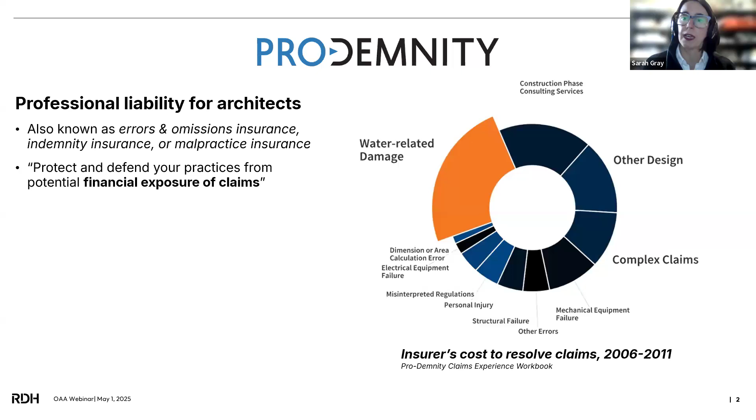So what kind of claims does Pro-Demnity manage? Well, from 2006 to 2011, which is unfortunately the most current information that I had, a big slice of the insurance claims that Pro-Demnity managed was related to water and water-related damage. And of that slice, almost two-thirds of those claims related to building envelope, building enclosure failures. In that regard, since 2004, Pro-Demnity has excluded coverage to architecture firms for ingress of precipitation, meaning water leakage claims.

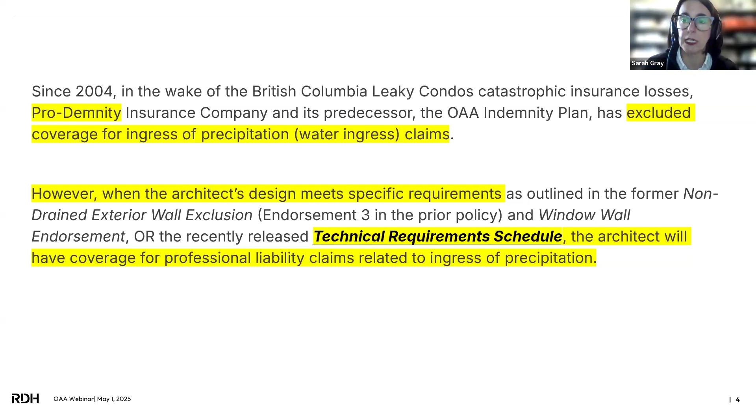However, don't freak out yet. When an architect's design meets the specific requirements called the technical requirement schedule, the architect or architecture firm will have professional liability coverage related to water leakage. So today I'm here to talk about the technical requirement schedule that Pro-Demnity has, but really I'm going to be talking about best practice building envelope design for precast wall cladding panels.

About a year ago, April 2024, Pro-Demnity issued new technical requirements, or really they were updated requirements. What do those requirements say? Well, you can go online to Pro-Demnity's website. You don't even need a login, password, or anything. You can download their technical requirement schedule. In short, they say that above grade wall assemblies that are designed and constructed according to rain screen principles that have positive drainage to the exterior will be covered by Pro-Demnity.

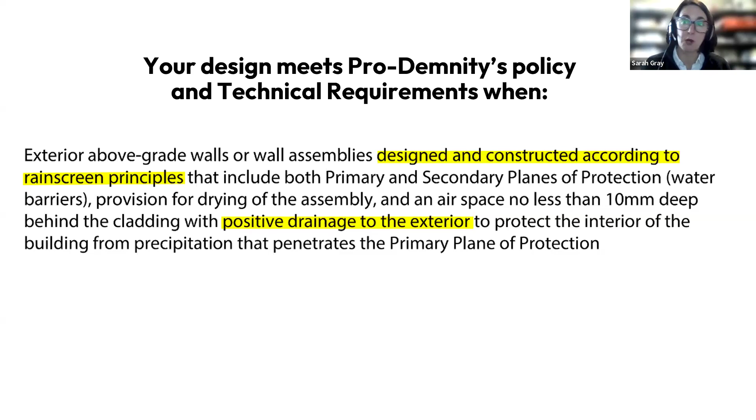If your design has a rain screen wall design assembly, you meet Pro-Demnity's technical requirements, in short. Most wall assemblies these days do have a rain screen design, but there have been some exceptions and some nuance over time. So Pro-Demnity has 3 sets of requirements. They used to be called endorsements. One is for exterior above grade wall systems, sort of an umbrella or general term.

Really, that was meant to handle exterior insulation finish systems, or EIFS. Original or older EIFS assemblies were not drained assemblies, and certainly now we do have drained EIFS assemblies.

Letter B, which we are talking about today, has a separate set of technical requirements for architectural precast concrete exterior wall assemblies. And then the third set of technical requirements that Pro-Demnity publishes is for window wall systems. Again, early versions and iterations of window wall systems were not drained, and certainly newer, current, modern window wall systems are drained.

So Pro-Demnity realizes that systems are available for above grade walls, EIFS, precast concrete wall panels, and window walls that are drained. Therefore, they're advising you as architects to use and design those drained systems.

So let's dig into the precast cladding requirements, which is why we're here today. In those endorsement documents you can download for precast cladding, the first requirement states that you must design, construct, test, and install precast panels with drained and vented 2-stage joints, with insulation as part of the wall assembly, with a continuous air barrier as part of the assembly, and with vapor control or a vapor barrier as part of that assembly.

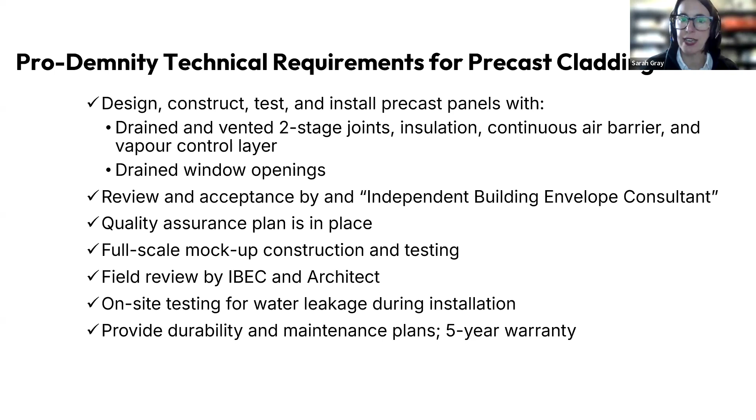So these check marks are the highlights, the summary of Pro-Demnity's requirements. Today, we're going to go into the requirements in detail. Certainly my lens is building science and building envelope design, so we're going to talk about the nitty-gritty technical details and design elements for precast cladding.

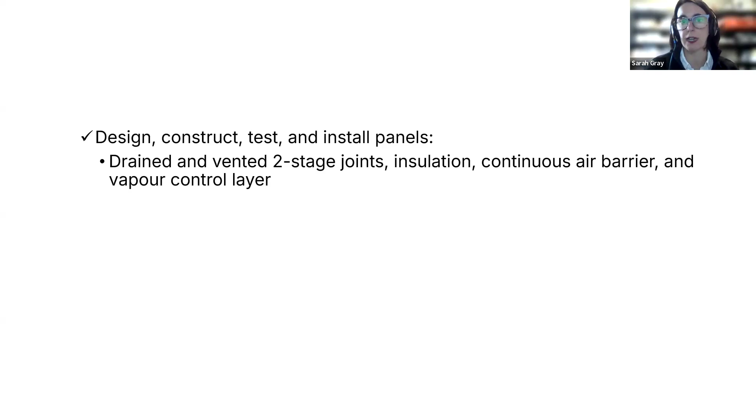So first and foremost, Pro-Demnity requires the drained and vented precast assembly. Why is that important? Well, as I mentioned, the rain screen design principle has been known and in use for many years. I expect that many or most architecture firms use that almost exclusively as the design. And what does the rain screen design principle look like?

Well, there's typically an exterior finish or cladding that's installed over insulation and over the air-water vapor barrier, which is all installed over the structure or support. So this is a very generic wall section, not necessarily precast, but this shows what we call a perfect wall assembly or a rain screen design. How is it rain screen? Well, that outer cladding is vented and drained, allowing moisture to drain out or dry out from the materials behind. That's very simple 101 of rain screen design.

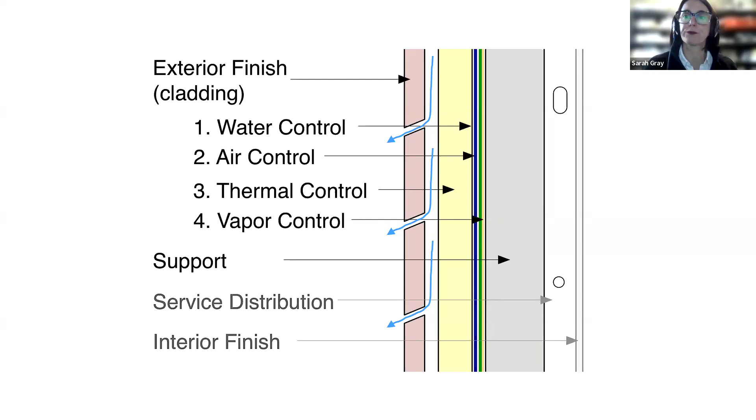How could precast meet the design of a rain screen? Well, the most simple approach for providing a rain screen design for precast is using hand set precast. These are typically smaller pieces of precast, both smaller in width and height, and also typically a bit thinner. They act as a cladding, very similar to how a metal panel could be formed as a rain screen cladding.

An aluminum composite panel, brick veneer could be installed as a composite panel. You can see that the precast is installed with an air gap between the back of the cladding and the insulation. You can see the air vapor water barrier membrane, the blue material behind the insulation, and then the concrete block backup wall behind.

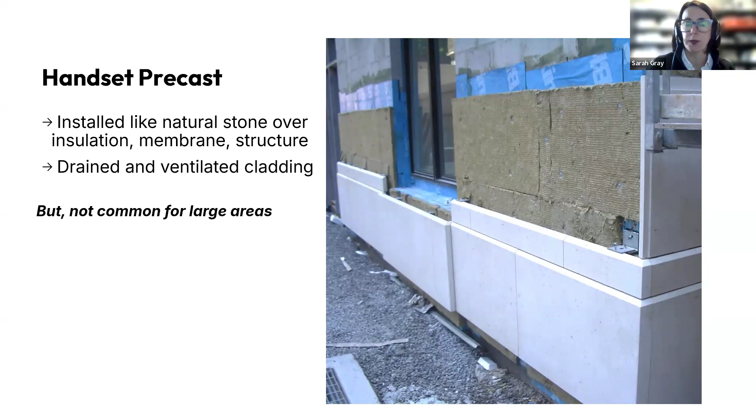So classic precast assembly. However, this is not typically what folks think of when we say the term precast cladding. We're typically meaning now very large format panels that could span floor to floor or even two floors and are quite wide, meaning meters wide. So instead of these smaller pieces that are installed very much like natural stone, we're looking at a more prefabricated large format wall panel system. And that's the intent of today's talk. But I just wanted to mention how precast could be installed as a true or traditional rain screen assembly.

So now let's look at the two more common precast panel types. First is what we call architectural precast or single-wythe precast. That's where we have a thicker precast panel system, maybe 4 inches deep, 6 inches deep, sometimes even 8 inches deep if it's these very large panels. Installed kind of like a curtain wall, they're hung off the edge of floor slabs with an anchorage system, and the precast spans floor to floor.

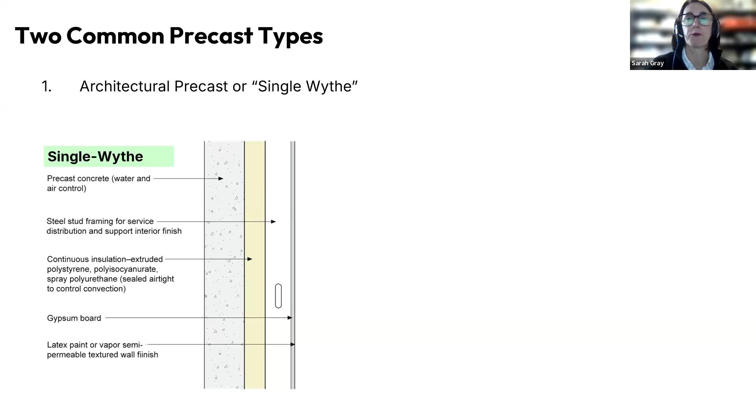The second common type of precast that we're seeing more and more today is the integrally insulated sandwich panel, also called a double-wythe precast panel. These panels are quite thick, 8, 10, or 12 inches thick. There's an outer layer or outer wythe of precast, very similar in looks to the single-wythe approach. But insulation and an interior backup wythe of precast panels is manufactured in the precaster's factory or shop.

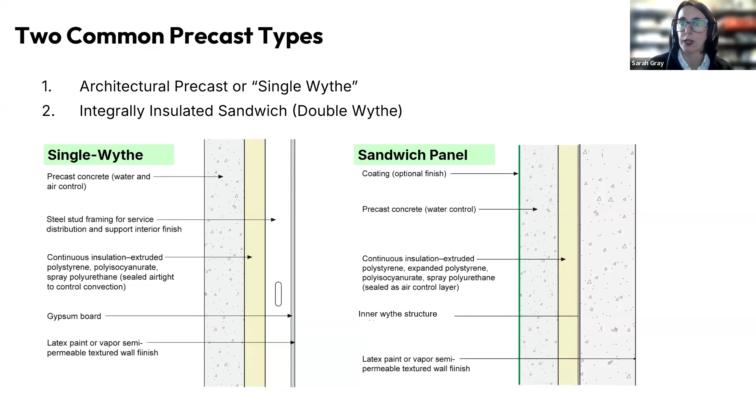These panels come assembled as this sandwich to the construction site and lifted together. Once these panels are lifted together and installed, you have the outer finish, the insulation between the panel, and the interior backup or even finish fully installed. In a sense, you have a complete building envelope with a sandwich panel. So let's take a deep dive into the details of each of these types.

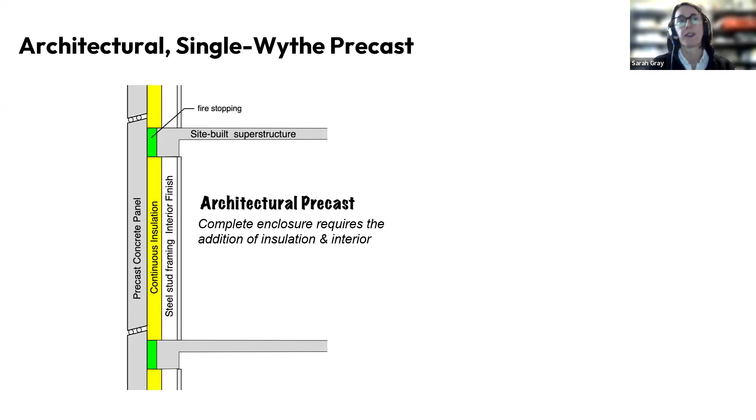So first, single-wythe precast. This is a very crude sketch of how these work. Again, the panels extend floor to floor in height. There's insulation behind them. Between the floor slab and the back of the precast panel that's hung, we'll have to add our fire-stopping insulation and smoke seals, and then the studs and framing go inboard of that.

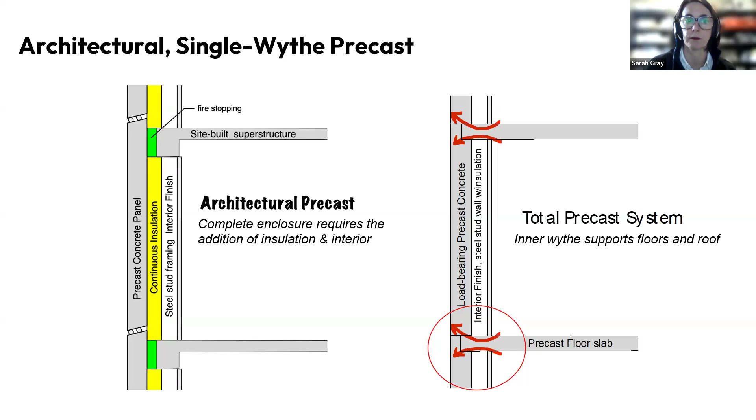There are cases where we have architectural precast as part of a total precast system where we have precast floor slabs and load-bearing precast that rests on the floor slab instead of being hung like a curtain wall. We won't go into detail for the total precast system today, but one thing to consider is that with the wall panels supported by the floor slabs, we have those red thermal bridges at each floor slab that we'll need to mitigate so that we don't have cold spots on the floor and energy losses. Okay, what does a building with single-wythe precast look like?

How are we providing that drained two-stage joint system between individual panels to provide rain penetration control? This is exactly what Pro-Demnity is asking of architects in their design. Again, building envelope water leakage is claim number one in their list of claims. So let's dive in. Pro-Demnity says that we must provide two-stage drained sealant joints. Again, those are the horizontal and vertical caulking joints between the individual panels hung off the building.

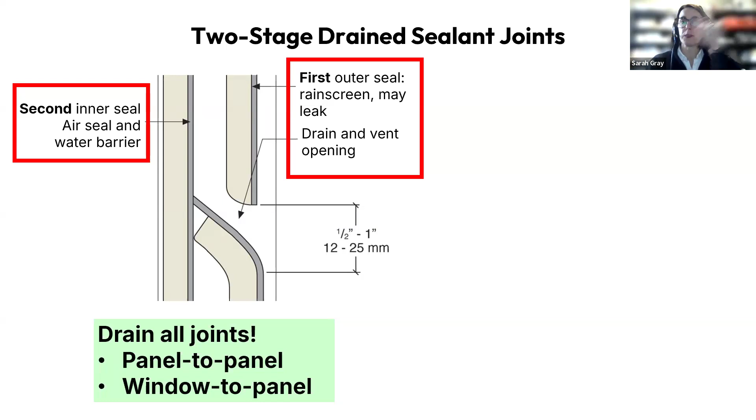So 2 joints are required with precast concrete cladding per Pro-Demnity. If you get anything out of this session today, this is the picture that you should have burned in your mind. Pro-Demnity again says we must drain all joints, meaning panel to panel, and also any sealant joints between windows and the panel itself.

So this is a good 2-dimensional snapshot. What does it look like in 3 dimensions? It gets a little more complicated because we have horizontal joints and vertical joints, as I mentioned. We've got 2 lines of sealant at the horizontal joint with a drainage space between, and also 2 lines of sealant at the vertical joints, again with the drainage space between. The concept is showing moisture, water droplets draining through that airspace between the two lines of caulking to the exterior. In practical terms, what does this complicated 3D drawing mean on site?

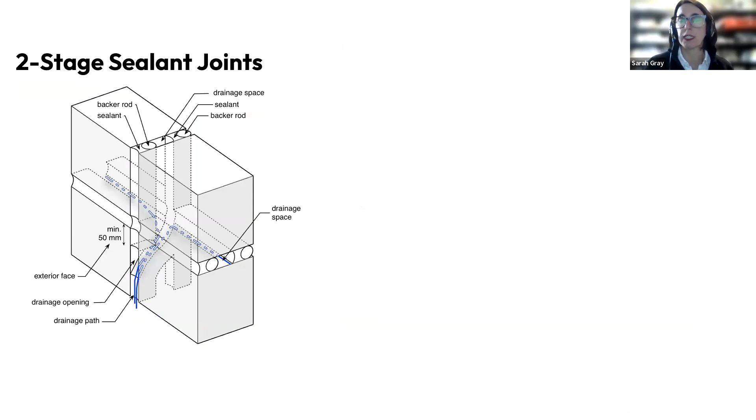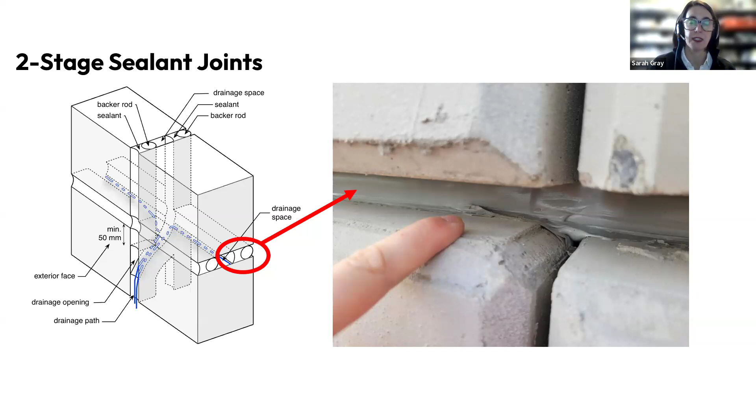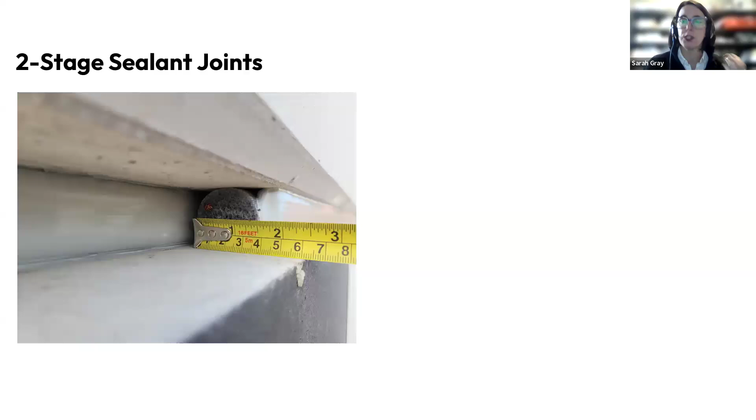So 2 lines of sealant shown here in the photo. We have a really nice cutaway to show the various dimensions. You can see to the left of the tip of the tape measure that there is a gap there. The gap does not need to be huge. I would say a minimum 3 millimeters or 1/8 of an inch does the trick. A little bit wider gives you some wiggle room and tolerance to make sure the backer rods and sealants aren't in contact with each other. So we don't need a huge airspace, but we certainly do need that space to provide the draining and venting.

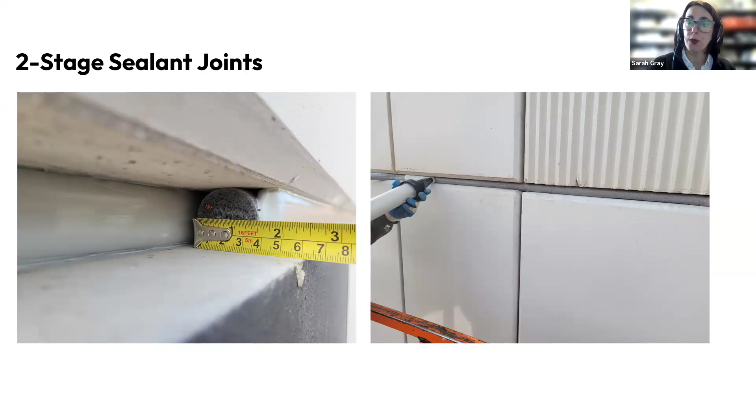And just another photo of how it comes into play on site. So the tradesperson is installing the outer line of caulking here on the horizontal. What does the weep hole or the drain slot look like? Well, this is a fairly well-detailed drain slot. It's at least 25 millimeters or 1 inch tall, the full width of the joint itself. You can see it has a ramped profile going up and inward to the air seal and backstop inside.

RDH typically does not require or recommend using plastic tubes or wicks. Just leaving that joint open allows it to wash itself clean of intermittent dirt or debris. And over time, we've found that the plastic weeps or wicks just fall out anyway. So detailing a nice, healthy drain slot meets the intent of Pro-Demnity.

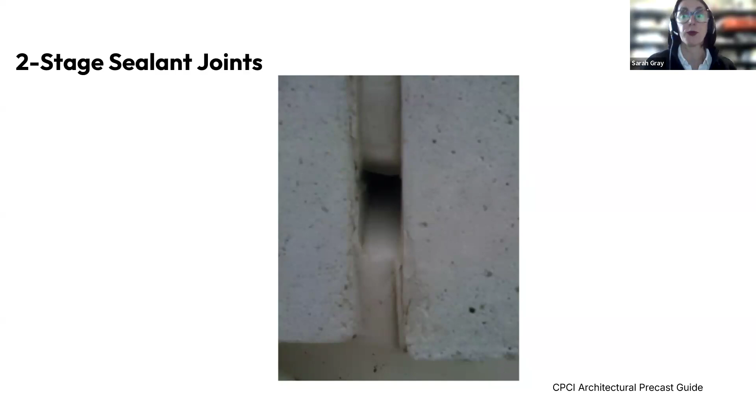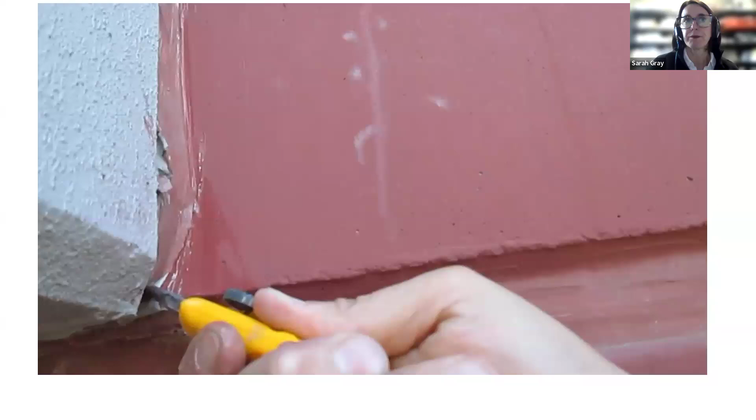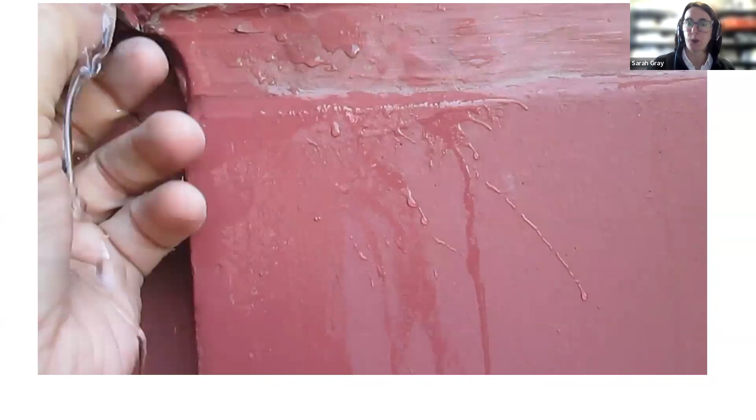So we often get the question, do we really need the weeps? Well, Pro-Demnity says we do, but just to bring the point home, we were conducting an investigation of some water leaks on an improperly detailed assembly. We cut open some caulking joints and found that there was water trapped within the sealant assembly. So yes, in fact, weeps are needed to allow any water through flaws or little skips to drain out. Again, we're mitigating the issue of water leakage that has been a sore point for Pro-Demnity over the years. So that's the 2-stage drain and rain penetration control function.

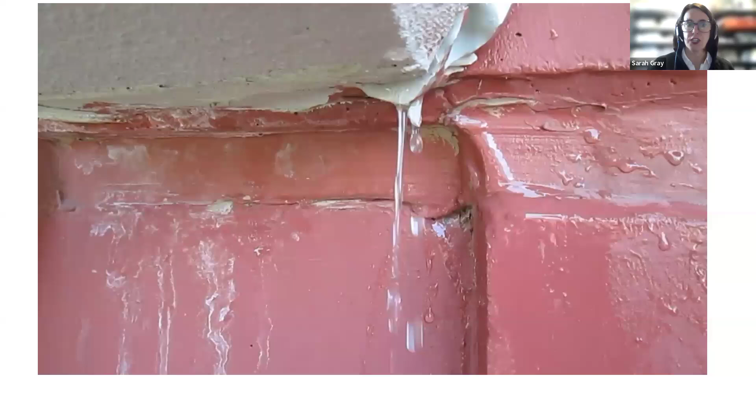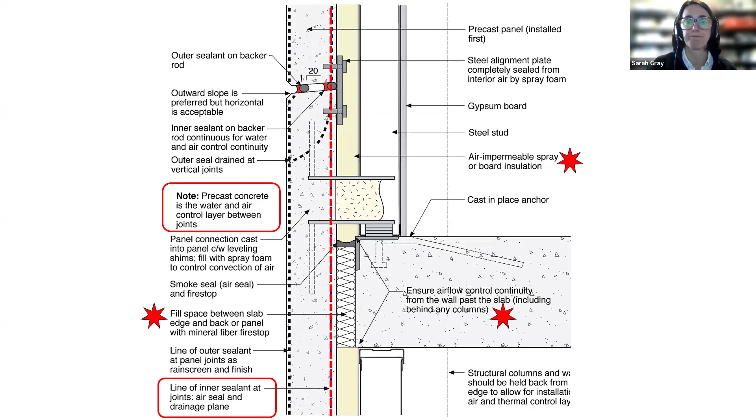Back in the old days, let's say the 1980s and 1990s, we typically did not use spray foams. We've come a long way in the spray foam industry these days. But back in the day, we used metal studs and fiberglass batt insulation.

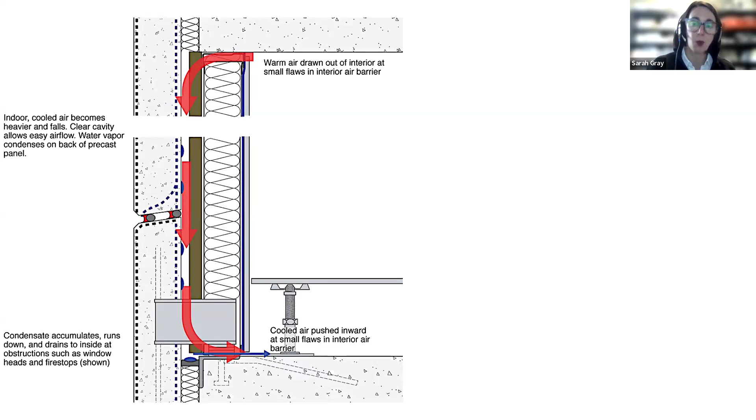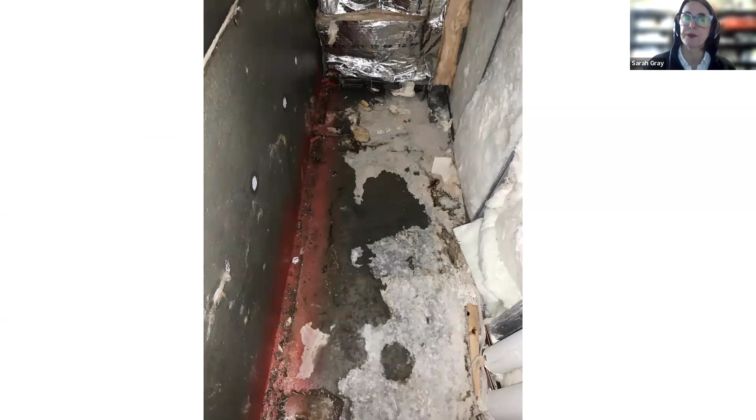The problem with that is that we didn't get a tight air seal to the backside of the precast. That allowed convective air looping, which deposited warm air and condensation on the back of the panels, which would then form ice. So this is an example of what not to do. We don't do this anymore. We do not want ice on the back of the panels because when ice melts, it forms water, which is a form of water leakage.

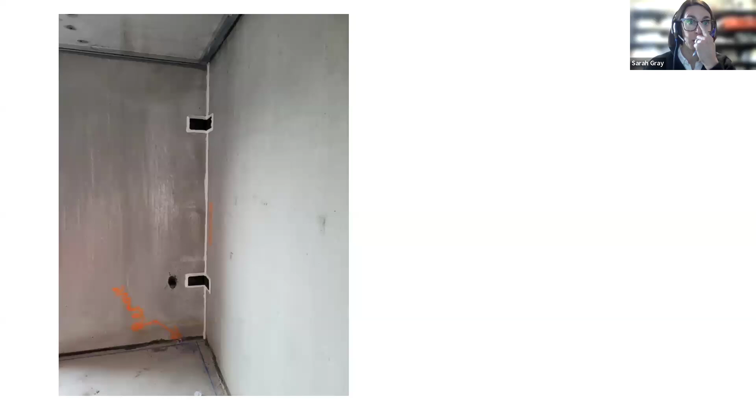Again, going back to first principles for the Pro-Demnity requirements. So going back to that precast building we showed, we want to seal all the joints in the precast, both from the interior and the exterior. We also want to seal all of those anchor plates because those can form or allow air leakage between the plate, the concrete, and through the bolt holes.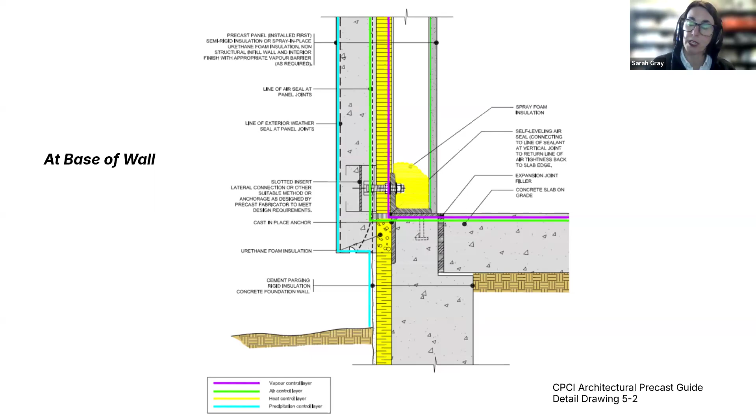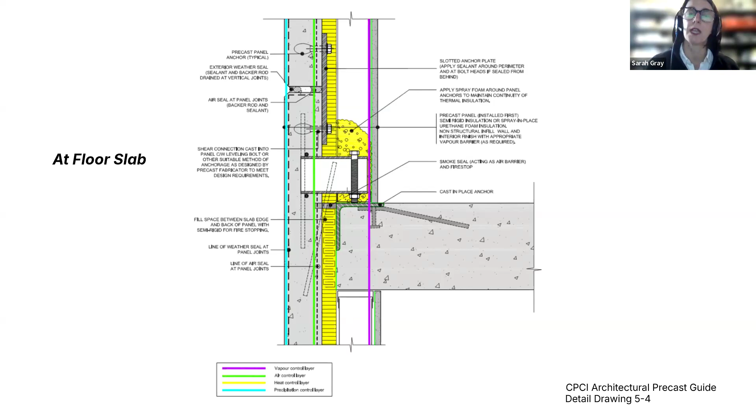Moving up, very similar to the sketch I showed earlier, here at the floor slab, we're providing insulation between the precast and the floor slab, up the wall, and providing insulation around the precast anchor. This is a best practice detail, part of the Canadian Precast Institute design guide, which I'll talk about in a bit. So these are illustrations for single-wythe or architectural precast.

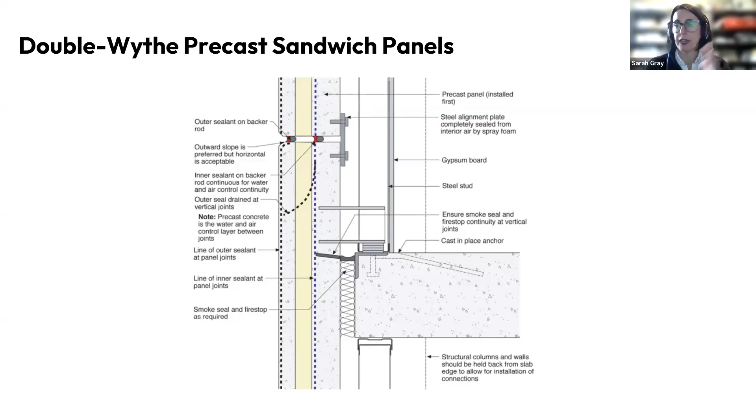Again, these are hung like a curtain wall off the floor slabs, but when they're hung, it's an all-in-one building envelope assembly. We still have to install our fire stopping and smoke seals at the floor lines, but we don't need to provide insulation around the precast anchors because our air, water, and insulation layer is within the panel itself.

How do we detail sandwich panels for rain control? The exact same way we do for single-wythe. We must have two-stage drain joints at all panel-to-panel joints. We need to have that nice, healthy rain screen slot as well.

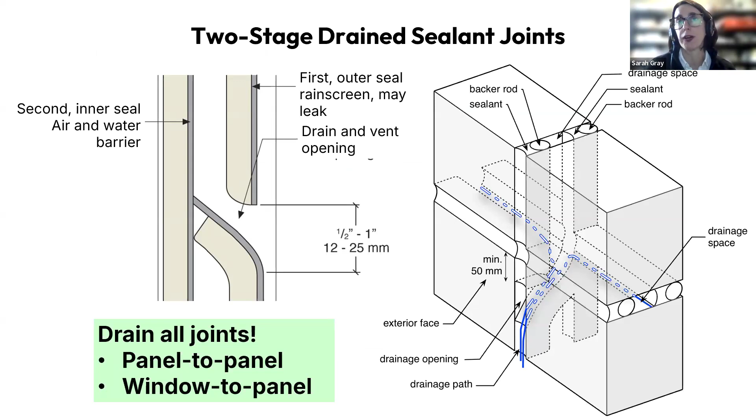What does that really look like for a sandwich panel? Well, here on the exterior, this is where we provide the double line of sealant. There's also an option and a strong recommendation to provide some insulation continuity at the joints there in the middle. And we often see and recommend an interior line of sealant that can serve as a finish if that interior face of precast is in fact going to be the exposed finish without drywall in the building.

That interior seal also provides a second air seal so that we don't get air leaking into that inner joint and perhaps causing some problems. So often the best practice is a triple seal approach for deep sandwich panels.

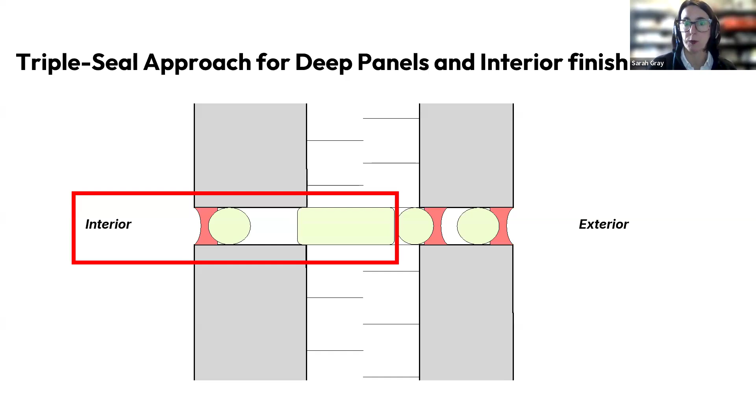What about insulation and air control for sandwich panels? Well, we already talked about that. It's an all-in-one solution. We have the insulation between the two wythes of precast, and we have that inner line of air seal as well. So sandwich panel, single-wythe, slight differences in detailing, but we still need the rain control, continuous insulation, and the air seal.

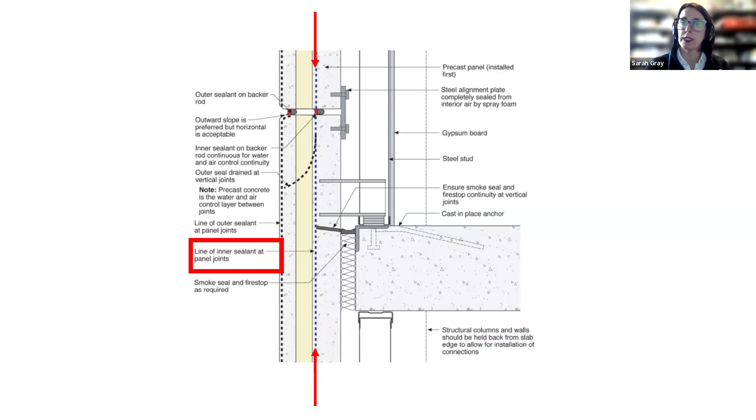Let's look at window detailing because after you install the caulking in the panels, half the battle is over, but the next battle is to get those windows airtight and watertight as well.

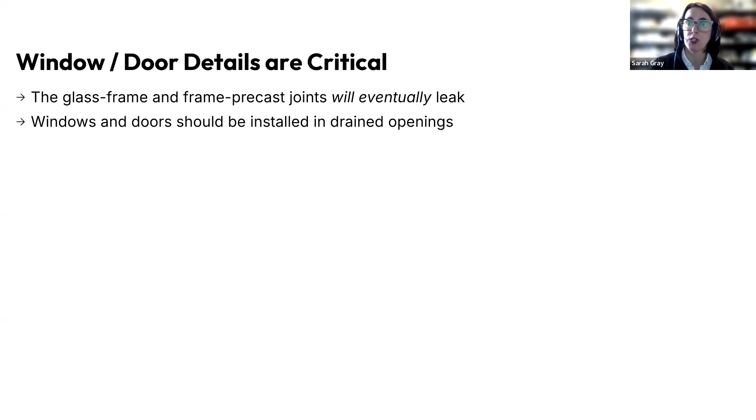From my practice, looking at older buildings that have aged 10 or more years, we often find that eventually the glass and frame joints and the frame to precast joints will leak. Sealant does deteriorate, so we want to anticipate leakage and provide drainage out of the system. Out of the precast, our two-stage drain approach provides drainage, but at windows we need a subsill membrane flashing.

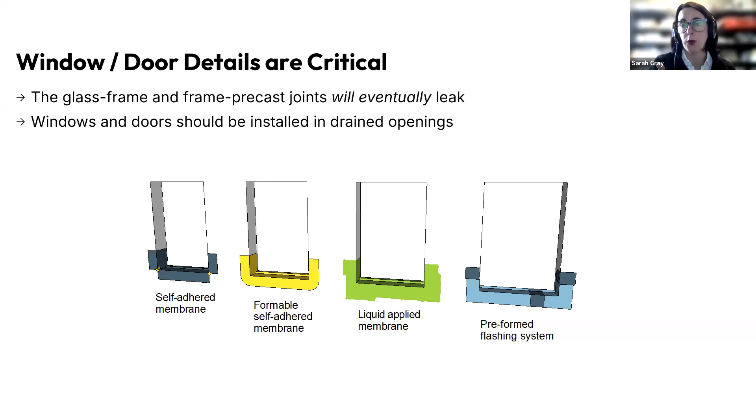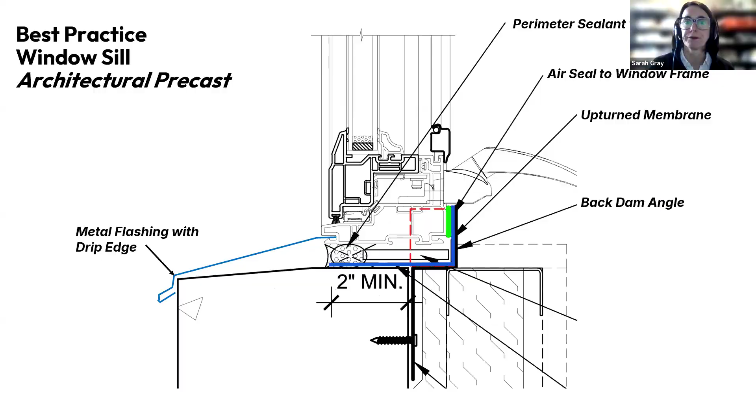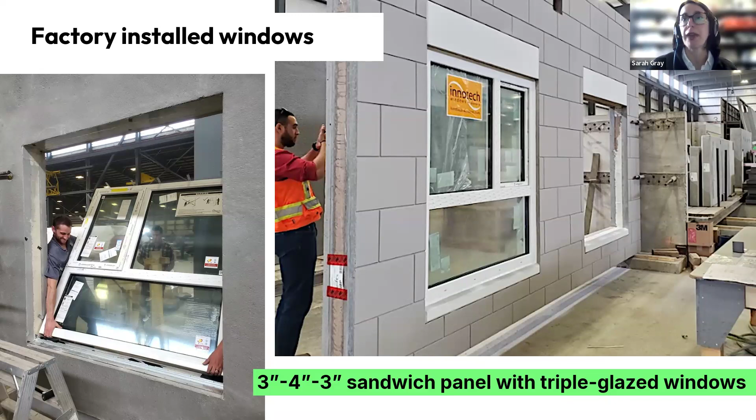Factory installation is a great idea if that can be accommodated, because the windows can be installed in a climate-controlled, dry condition. It's very comfortable. Folks are walking on the floor installing, instead of at height, 20, 30, 50 stories up in the air. So we do see more pre-panelization of both the precast and the windows in the factory.

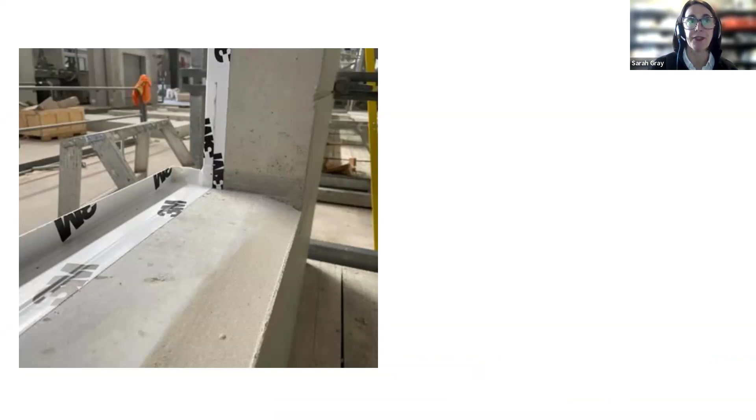Here's a photo of that subsill membrane flashing. In this case, we're not carrying the membrane all the way across to the outer face of the precast. We're recessing the membrane to cover the critical joints and form that bathtub with the upturned leg at the back of the sill and also at the jambs.

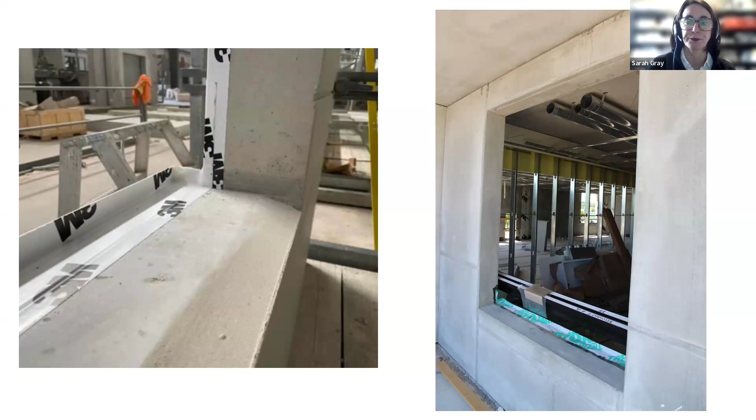Here's what that will look like in a little bit different configuration. This is a different building, but again you can see that subsill flashing, and the window on the interior waiting to be installed. So the critical detail for windows is that subsill membrane flashing and drained sealant between the window and the precast itself.

So metal flashings, though they do cost money and maybe they don't give the specific aesthetic that some folks like, can make a difference in aesthetics and performance in the long run. That's why we recommend them.

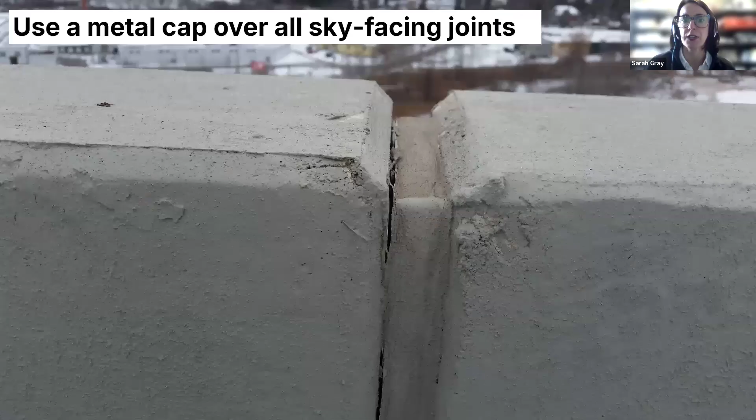Another common best practice consideration is to use a metal cap over all sky-facing joints, not just to shed water and control staining, but also to mitigate water leakage through sealant joints that will eventually crack and debond. So we don't want to see this - I'd like to see a metal cap flashing over this exposed panel top edge.

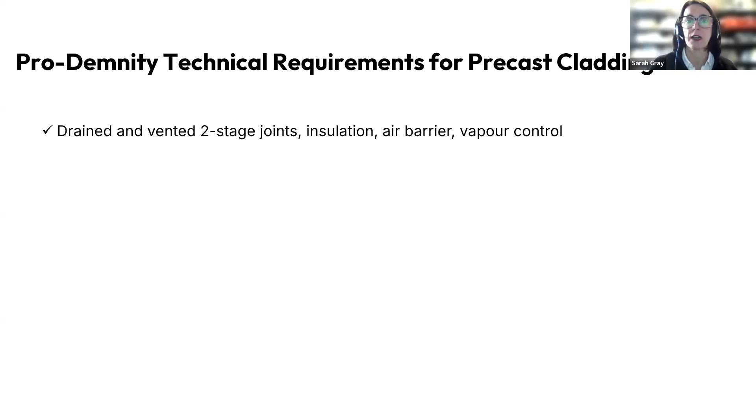Okay, so we've talked about drained and vented two-stage joints, installing insulation, the air barrier and air seals, and vapor control is the precast itself. What's the next requirement from Pro-Demnity for precast? That's the review by the independent building envelope consultant to conduct a peer review of the architect's design of the system to make sure it meets Pro-Demnity's requirements.

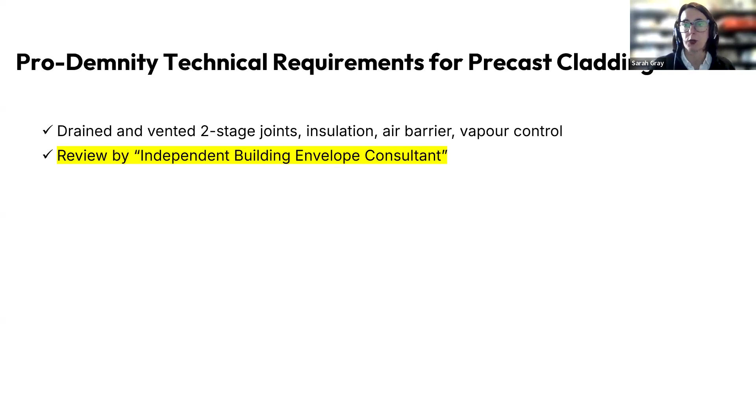So who can be the IBEC? A licensed architect who's not the design architect on the project could be the IBEC. Also an engineer, typically a building envelope engineer, could serve that role. Certainly you want to hire an IBEC who has experience with precast, both design and installation on site.

The IBEC cannot be the same person or company that's providing Tarion's Builder Bulletin 19 services. They want to maintain separation in that regard. And as I mentioned before, the IBEC needs to be independent from the primary design team. The IBEC is a third party.

Typically, we see developers retaining the IBEC. That'll be a discussion between you, the architect, and your client, the building owner or developer, on who needs to retain the IBEC. Pro-Demnity doesn't get involved with that businessy bit. Pro-Demnity just says there must be an IBEC on the project with precast.

So the IBEC first reviews the design, all of those elements that we talked about through the sketches and photographs. So we're looking at precast cladding components.

We're looking at all the building envelope control layers for water, thermal, air, and vapor. We're looking at the precast anchorage, not so much the structural design for building envelope, but how we're detailing around those anchors with sealants, caulkings, and the spray foam that I mentioned before.

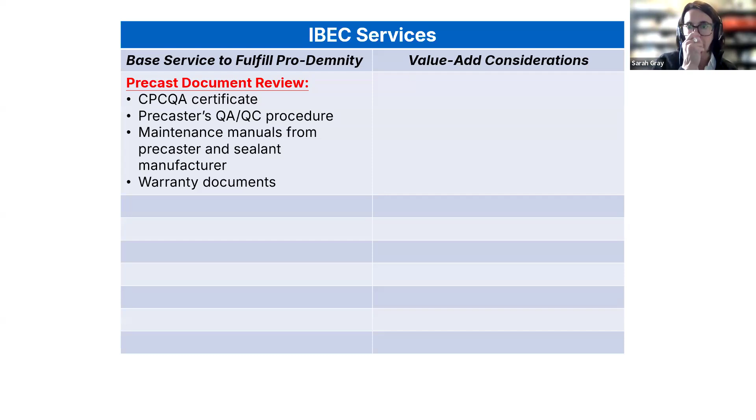Before any precast gets manufactured in the shop or brought to site, the IBEC conducts a document review related to the precast. We're looking for the Canadian Precasters Quality Assurance Certificate, making sure they have an in-shop quality assurance, quality control procedure in place. We're looking at their maintenance manuals, and we're making sure that they can eventually provide a warranty. What does their standard warranty say? Does that provide adequate coverage for the project?

As I mentioned, the next step after the document review is that design review. So as part of that, the IBEC is making sure that the architect's design follows best practice design guides. Those include CPCI, Canadian Precast Concrete Institute's Architectural Precast Concrete Wall Guide from 2017, and CSA standard A440.6 for high exposure fenestration installation.

So both of these guides basically include all of that best practice detailing that I showed in my previous slide, things like providing critical barrier continuity, seals, air barrier continuity, insulation continuity. The CPCI guide is available as a free download from their site.

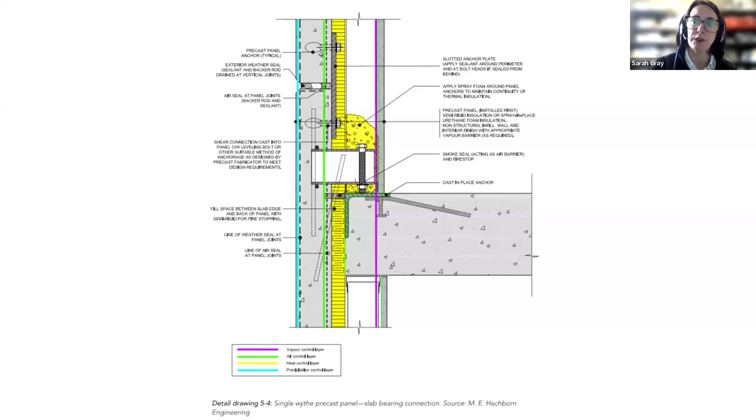Malcolm Hachborn and others authored this guide. It has good narrative discussion, but it also has a series of details. This probably looks familiar, I just showed that earlier. That shows not only the installation concepts and geometry for the precast in comparison to the structure and floor slab, it also shows those building envelope control layers which need to be continuous throughout the design.

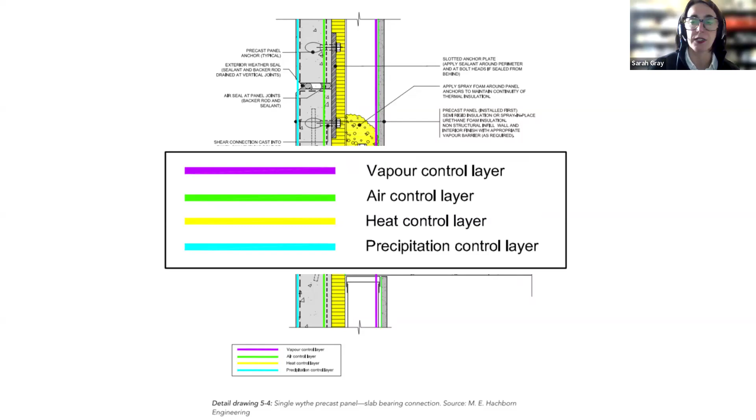So CPCI's design guide sketches are very, very helpful. And CSA A440.6, in high-level summary, basically says provide subsill membrane flashings and drain sealants. Of course, there's more detail in that standard, but again, they're looking for best practice window installations.

Okay, we've got the design over with. The precast cladding manufacturer is on board. They're producing their own shop drawings. The IBEC needs to review the precast shop drawings as well as the architect, of course.

On the engineered shop drawings, we're looking that those drawings are project specific. They certainly need to include the structural attachment of how the precast is going to get hung to the building. And we're also looking for the continuity of the air seals, the insulation, the drained rain screen design.

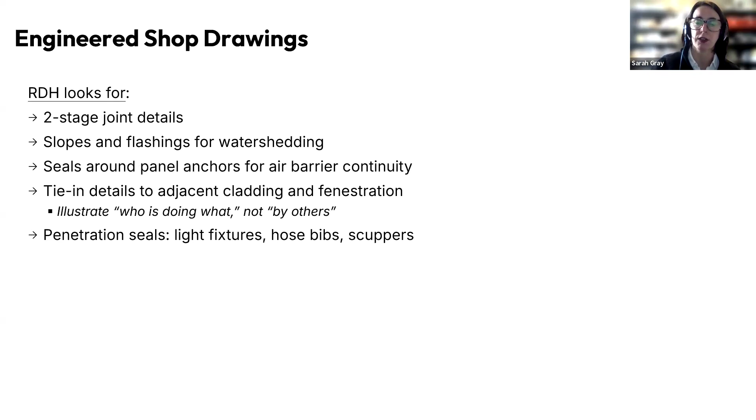We're looking for those tie-in details, as I mentioned, and there are typically little details that the precast shop drawings may miss, such as sealing around light fixtures, hose bibs, scuppers, etc. So we want to make sure that those typical details are also included on the shop drawings.

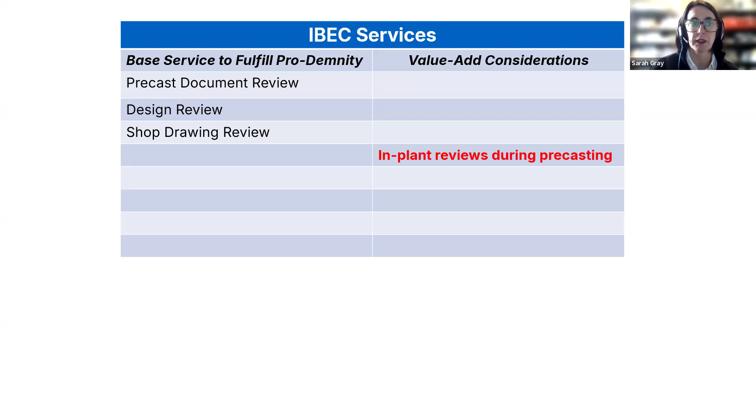The next step in the IBEC process could be for the IBEC to conduct in-plant or in-factory reviews during the construction and manufacture of the precast panels. That's not required by Pro-Demnity. That may be something desired by the project team if there are tricky details or some sort of aesthetic that needs to be reviewed in the plant.

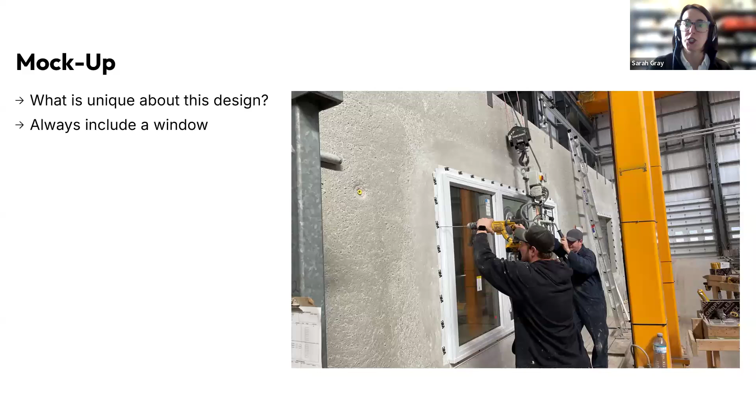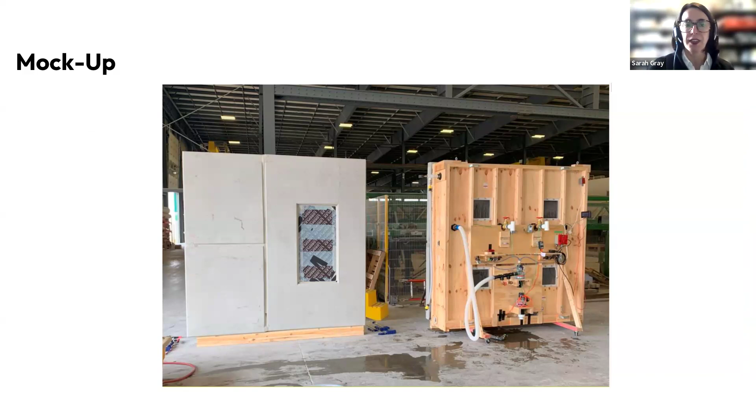Tests are conducted on the shop, where we're really testing that two-stage drainage joint and the installation of the window within the panel itself. If we've passed the mock-up, the next step is for the factory to make all the precast panels and bring them to site, and then the IBEC needs to conduct field review.

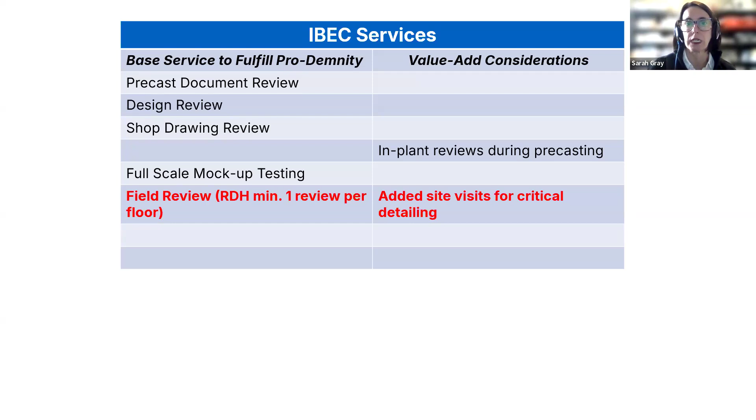Pro-Demnity does not prescribe a number of site reviews. RDH's typical approach is to provide one site review per floor of panel being installed. We could conduct additional reviews if desired, or if there are tricky details. So what does our field review include?

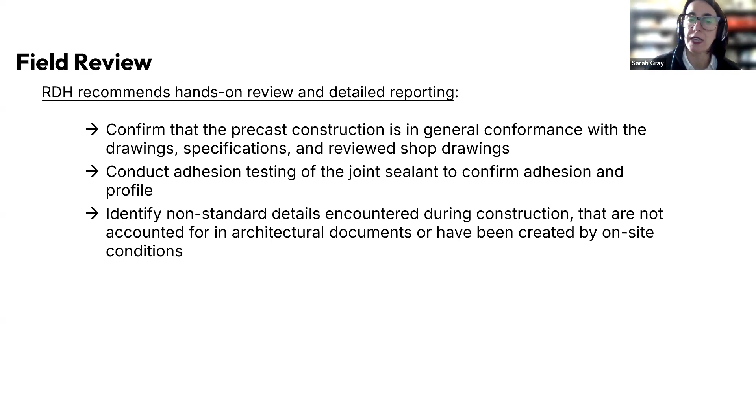A hands-on, detailed review, not just a drive-by in the car, not just a checkbox to say we were on site when we maybe weren't. Our RDH team goes on the wall, hands-on, either from exterior scaffolding or interior access, to review the two-stage joint seals, conduct adhesion testing of the sealant joints, look at any non-standard details that may need RFI and site instruction, and talk to the contractor installer to make sure they understand everything needed so that Pro-Demnity is satisfied.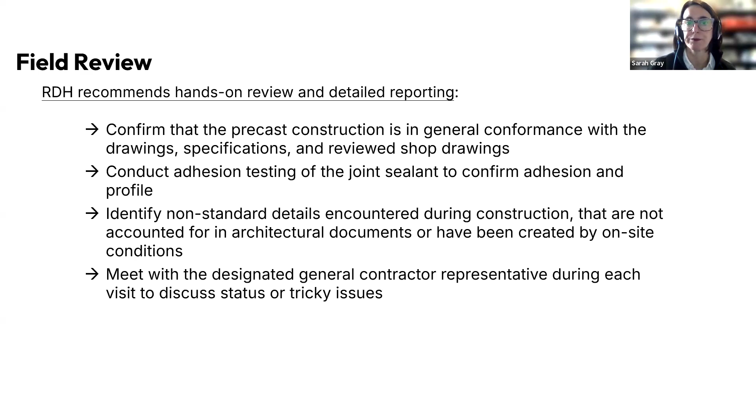What are we looking for in the sealant joints? We're making sure the specified material is being used. We're looking for backer rod, surface prep. Some sealants require primer when applied to precast, so we're checking that's applied where required, and we're spot checking the profile.

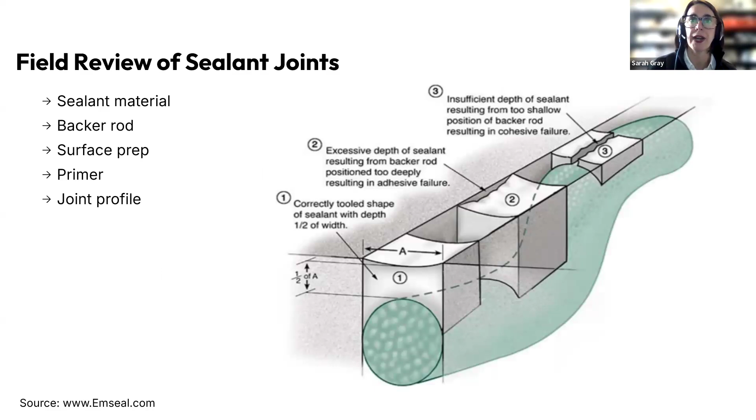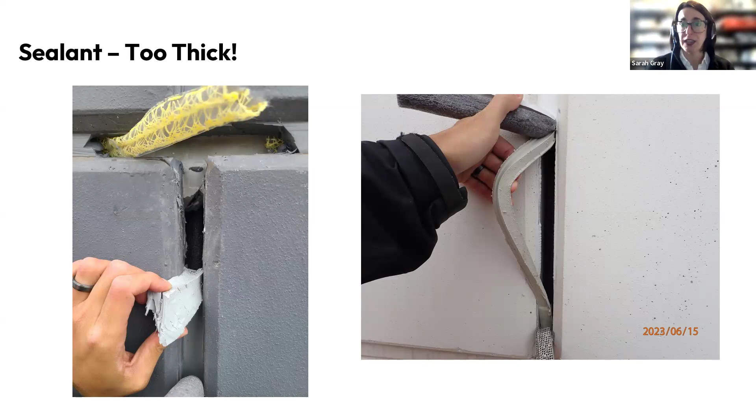Here you can see a sealant joint that's just way too thick. Having an inch or more depth of sealant is a waste of material, and that blob of sealant won't provide the stretch or squishiness needed to accommodate thermal movements or structural deflections. So when we see sealants that are too thick, we'll flag those for replacement.

On the opposite side, we also see cases where sealant's been applied too thinly — it just doesn't have enough bite to the precast to form an effective seal. In some cases, even if the sealant is the right thickness, it can be debonded, maybe because of the surface texture of the precast, or dirt, dust, debris on the concrete when applied. So we'll do probing and test cuts, pull tests, to confirm the sealant's adhered, and mark debonded areas for replacement.

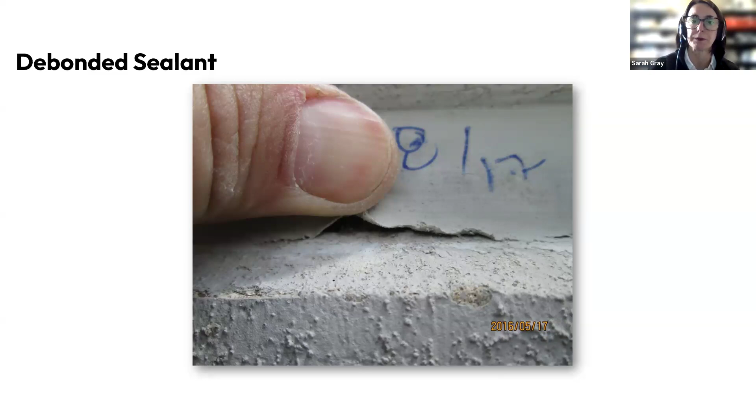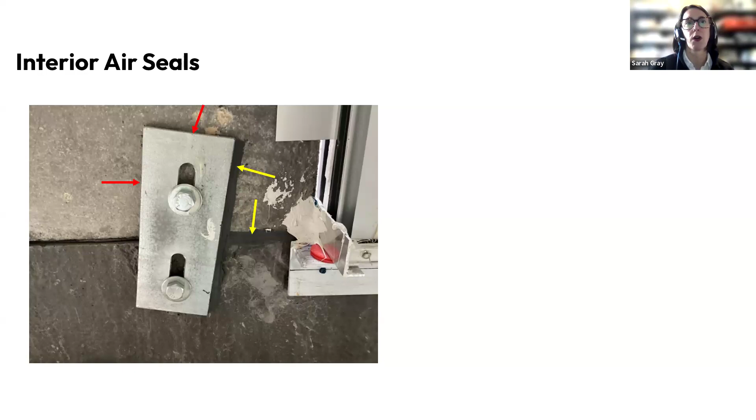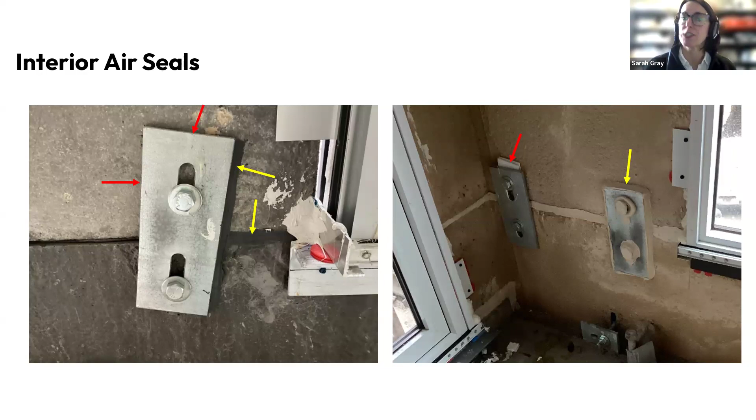A second example on the right-hand side: the yellow arrow shows a nice complete seal system, but on the left side anchor, for whatever reason, they forgot to seal it. So we'll flag that to get those sealants installed and reduce air leakage.

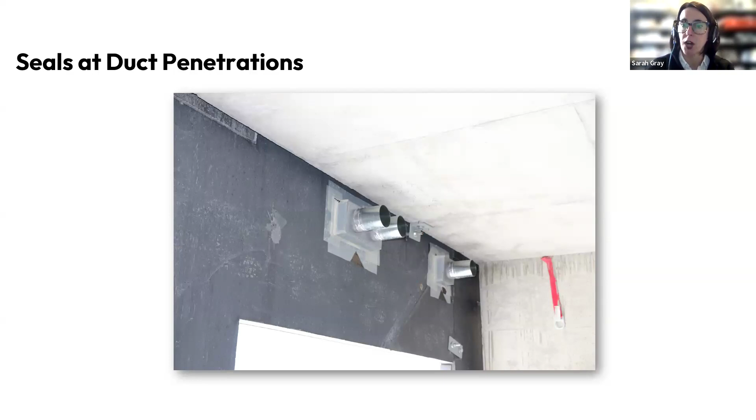For bigger penetrations like this exhaust duct bank, it looks like this installer used a membrane product to more effectively seal the exhaust box to the back of the precast. These seals need to be installed before the spray foam insulation is applied — spray foam is insulation, not an air seal in this case. So we want to see caulking and membrane products providing the air seal.

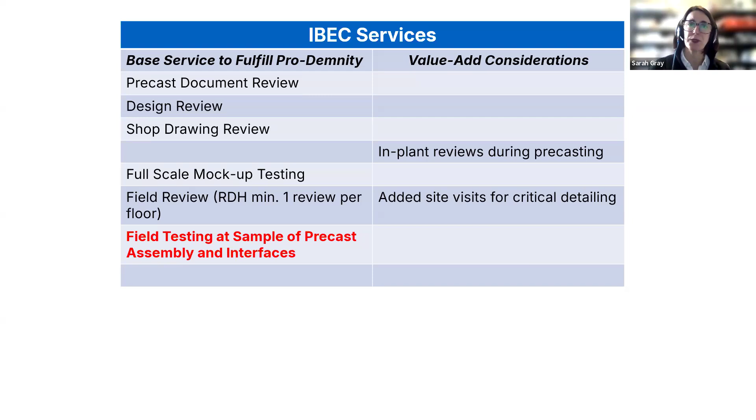So once it's installed, we start our required field testing. What kind of field testing do we do? Well, one of our favorite tests is making sure those two-stage joints are in fact draining.

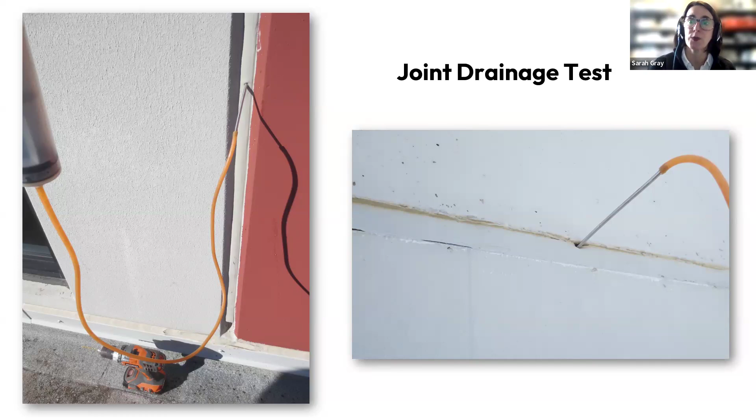We use a veterinary hypodermic needle rigged up to a gravity-fed water line, injecting water into the airspace between the inner and outer seal to see if it drains out the bottom weep hole. It's a very simple, easy test, no ASTM standard on this one — we're just checking that the seals are continuous and draining.

We'll also conduct more standardized testing, the ASTM E1105 field water test. Here we're testing the window installation in the precast where we have the panel-to-panel joints. On the inside of the building, we'll have a polyethylene chamber constructed, and we're drawing a pressure difference across the window and panel to simulate wind-driven rain.

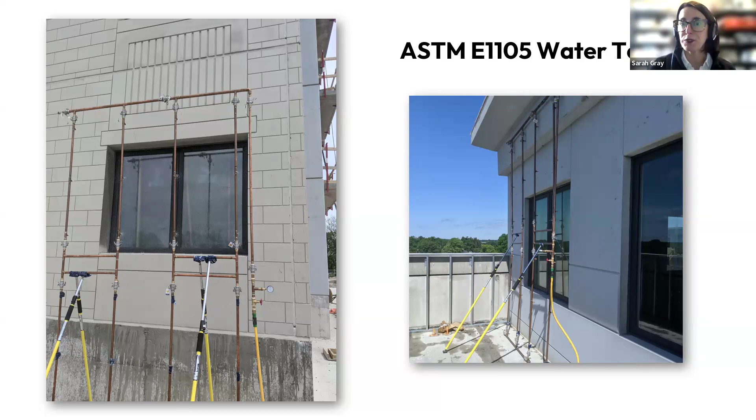Once we pass the field reviews and on-site tests, and the installation is as designed and per best practice, the IBEC will provide their final letter to Pro-Demnity. There's no set format for that — it's a one-pager attesting that the IBEC has fulfilled all the steps that Pro-Demnity's technical requirements lay out.

So that was a lot to handle. I'll do a quick summary and then we'll take questions. Pro-Demnity's requirements for precast cladding: first, always use best practice enclosure control layers for your precast cladding assembly. We certainly want to use two-stage joints — that's the big message here today. You'll also need to retain an independent building envelope consultant to fulfill Pro-Demnity's requirements.

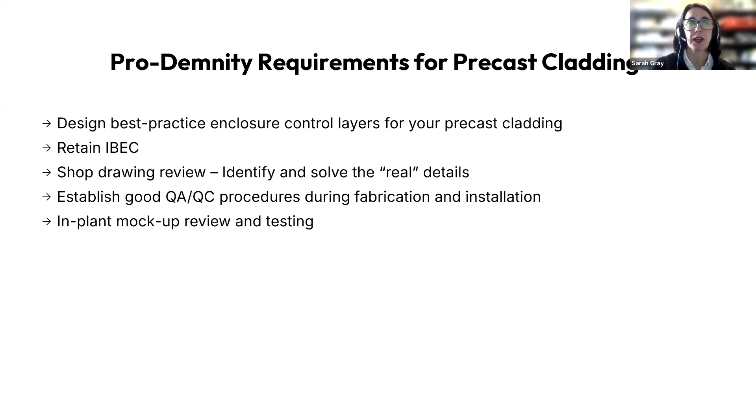That person or firm will do a shop drawing review to identify and resolve the real details for the building. Establishing good QA/QC procedures during fabrication and installation, including the in-plant mock-up, review, and water tests. Then, once the panels are on site, conducting field review and more testing.

So if you have questions or want to explore more, you can visit RDH's website on our technical library. You can search the word precast, and we have three guides, including CPCI's best practice guides and some other white papers and peer-reviewed papers regarding precast cladding design. And with that, we'll hand it over to questions.